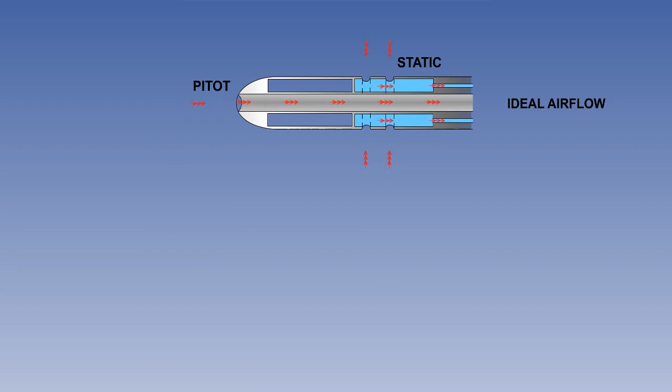However, if the aircraft is moving, a suction effect will be created which will cause the static pressure sensed to be lower than the ambient pressure. As the speed increases, the airflow in the region of the pitot-static heads becomes turbulent and this under-reading becomes greater.

How great the error may be depends on the location of the pressure head and the speed of the aircraft. Speed and turbulence may also affect the pitot tube readings, making them either above or below their correct value.

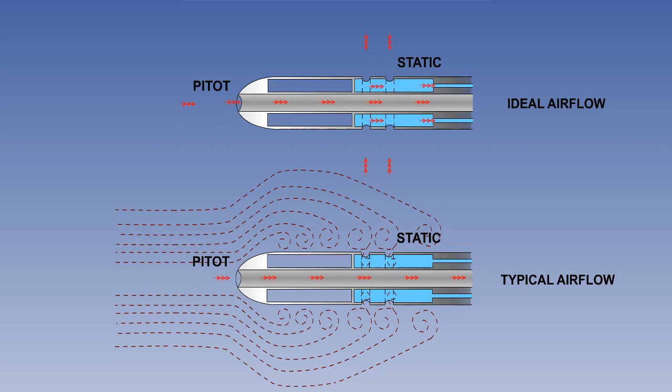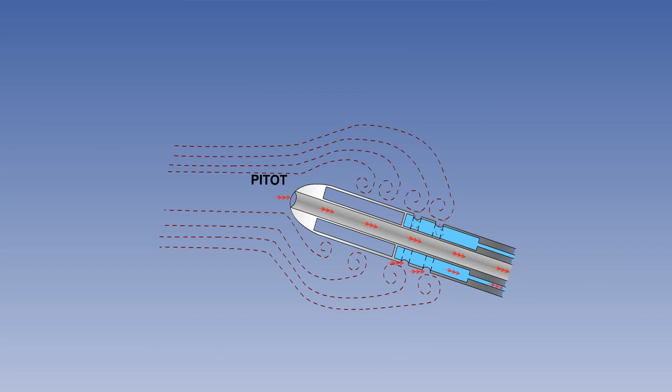At high angles of attack, a component of dynamic pressure may also be sensed at the static head. Any error sensed is likely to be at its greatest at high angles of attack and low speed. The high angle of attack may also cause a loss of dynamic pressure in the pitot tube.

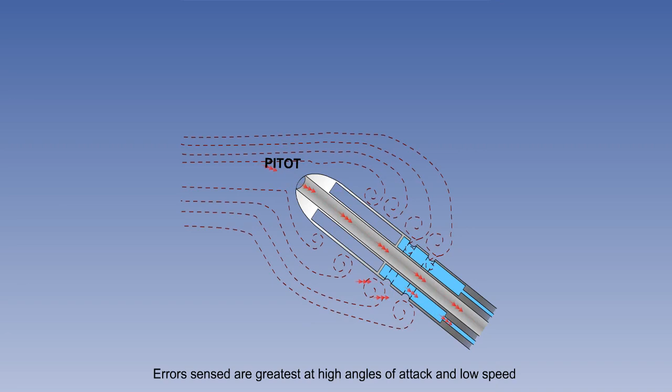Operation of the flaps or slats can cause significant changes to the angle of attack, which in turn can affect the turbulence created, and flight manuals may list different values of position error for different flap settings.

Before moving on to the next error, which is maneuver error, let's look first at how the effect of position error can be reduced.

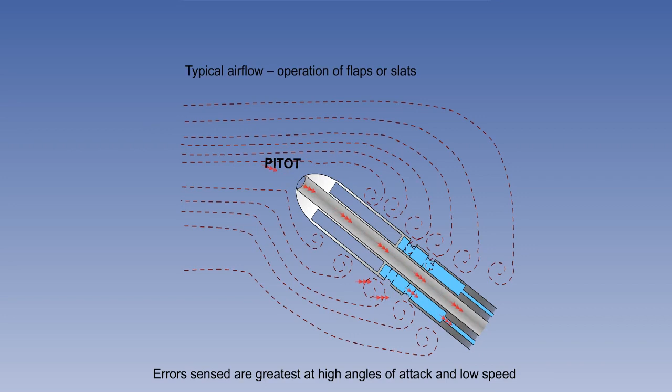The effect of position error can be substantially reduced by replacing the static pressure head with a static vent. There are some locations on the aircraft, usually on the side of the fuselage, where true or nearly true static pressure can be sensed over the whole speed range of the aircraft. A static vent is fitted in this location.

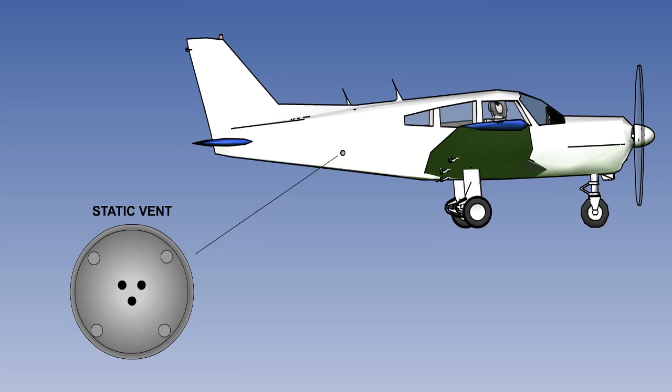The vent consists simply of a small flat metal plate with holes which form a vent opening in the centre of the plate. The vent is fitted flush with the fuselage and is connected to the pressure lines which feed the pressure instruments. The pressure line is angled upwards from the vent in order to prevent the accumulation of water and therefore does not require heating.

About 90% of the combined pressure head position error can be eliminated by the use of a separate static vent.

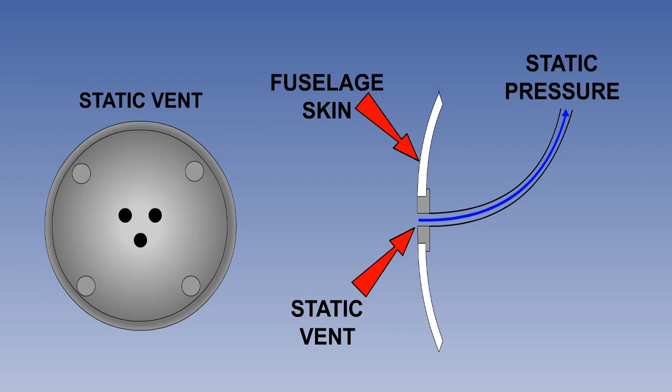It is usual to have two interconnected static vents, one on each side of the fuselage, to ensure that any errors produced by side-slipping or yawing are minimized or balanced out. Duplication also reduces the chance of the system becoming blocked.

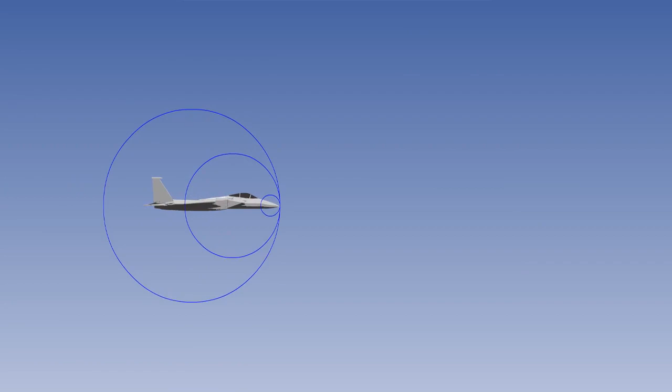However, static vents are not suitable for every aircraft. For instance, aircraft designed for very high speed are unsuitable because the shock waves generated at high Mach numbers can produce significant errors in the pressure sensed by a static vent.

On very high speed aircraft, therefore, a more sophisticated combined pitot-static head or high-speed probe is used. This will have been specially designed to reduce position error, but will be more expensive than the basic combined probe found on low-speed aircraft.

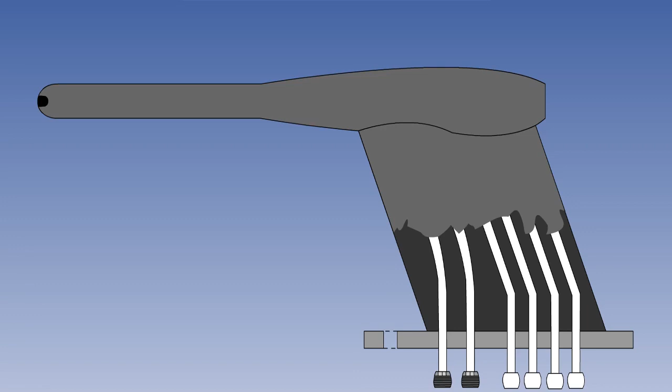The second error we will consider is maneuver-induced error. This error results mainly from temporary fluctuations of air pressure at the static vents, caused in particular by changes in the aircraft's angle of attack or when the flaps are activated.

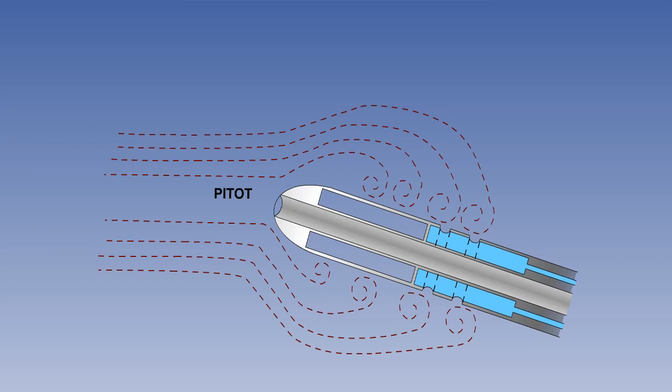The error is usually most significant during pitch changes, such as at the start of a climb or levelling off and descending.

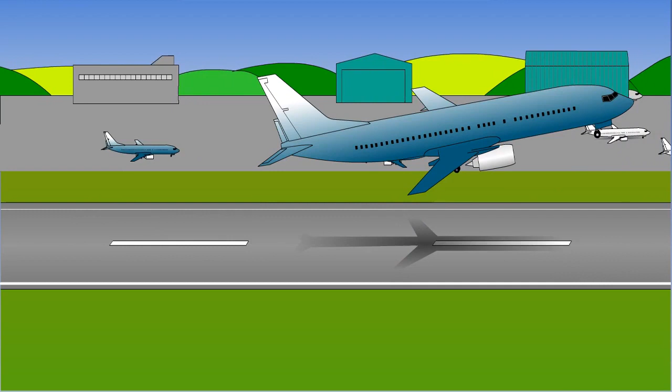Maneuver-induced error normally causes a lag in pressure instrument readings.

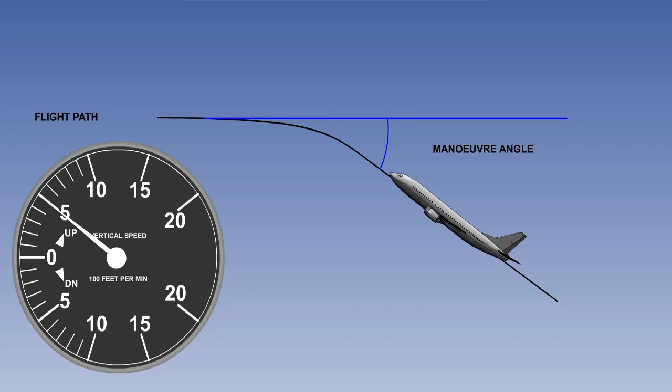The error is best illustrated by looking at a vertical speed indicator reading as the aircraft levels off. In level flight, the pointer on the VSI will read zero, so keep an eye on the pointer. In our example, the aircraft is climbing at an indicated reading of 500 feet per minute. Watch what happens to the reading when the aircraft levels off, and we can see that the VSI reading is not an accurate representation of the aircraft's actual flight path.

The lag in pressure instrument readings can persist for some time after the event, and therefore pressure instruments cannot be relied upon to indicate accurate instantaneous rates of change. The higher the altitude of the aircraft, the longer the error will likely last.

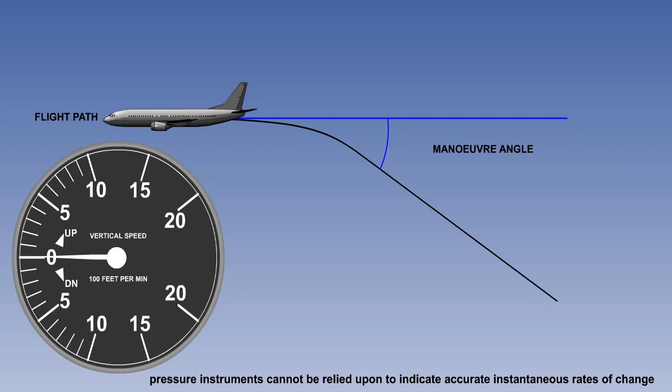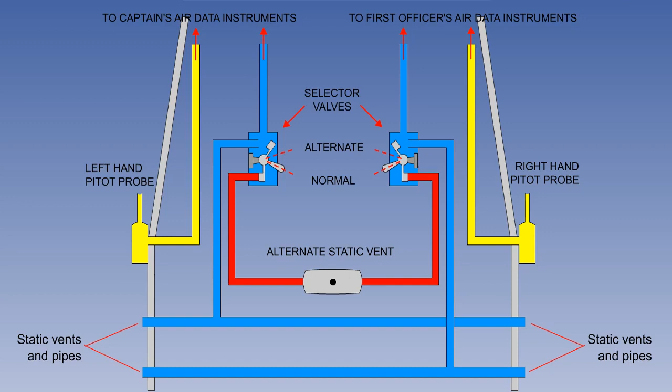Although the captain's and first officer's systems are usually independent of each other, they each sense pressures from both left and right sides of the aircraft. Note that the two static systems are also capable of being cross-fed and supplied by an alternate static source.

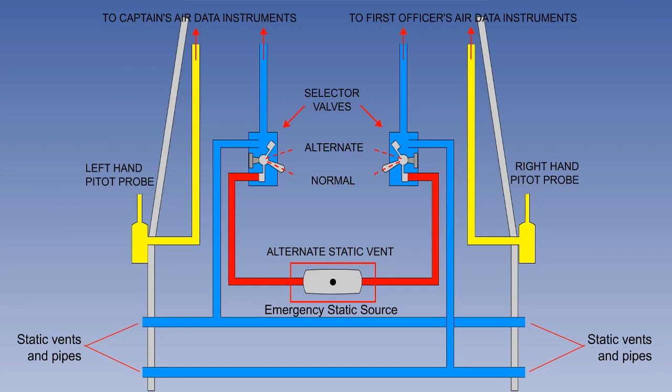The alternate static source may also be referred to as an emergency static source, for use in the event that the primary source becomes blocked. It is unlikely that the alternate static source will be fitted in the optimum location on the aircraft, and so it will provide a less accurate reading.

In pressurized aircraft, the alternate static source is often located within the unpressurized rear fuselage, and in unpressurized aircraft, the alternate static source can be located within the cabin. We can see a typical location in an unpressurized aircraft here.

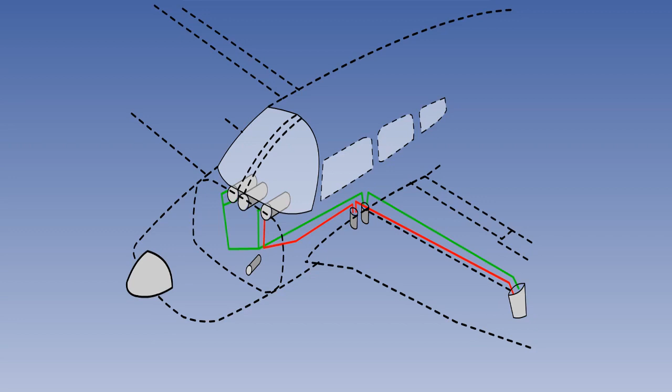Often, as a result, the static pressure sensed will be lowered slightly due to aerodynamic suction, and this will cause the pressure altimeter and the airspeed indicator to overread. The error should be tabulated in the aircraft flight manual.

In older or basic aircraft, air pipelines are used to transmit the pitot-static pressures to the instruments. A simple pipeline is illustrated here. Modern aircraft transmit the information electronically via pressure transducers at the pitot and static sources.

The effect of blockages and leaks in the pitot-static systems on each of the pressure instruments is dealt with in the individual instrument lessons. This concludes the lesson. A summary follows.

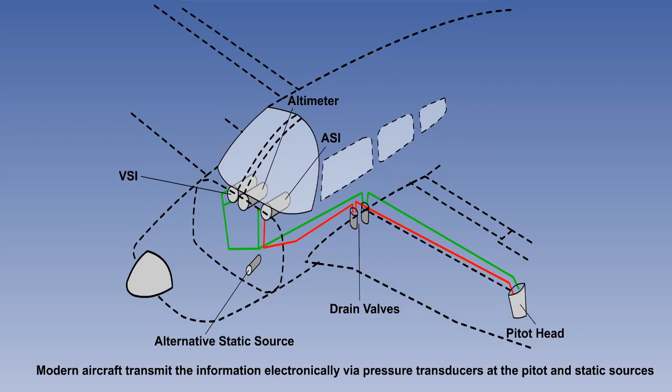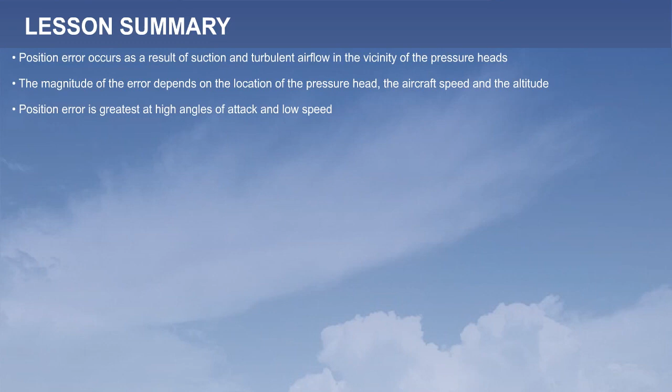Position error occurs as a result of suction and turbulent airflow in the vicinity of the pressure heads. The magnitude of the error depends on the location of the pressure head, the aircraft speed, and the altitude. Position error is greatest at high angles of attack and low speed. Operation of the flaps and landing gear can have a significant effect on the turbulence created.

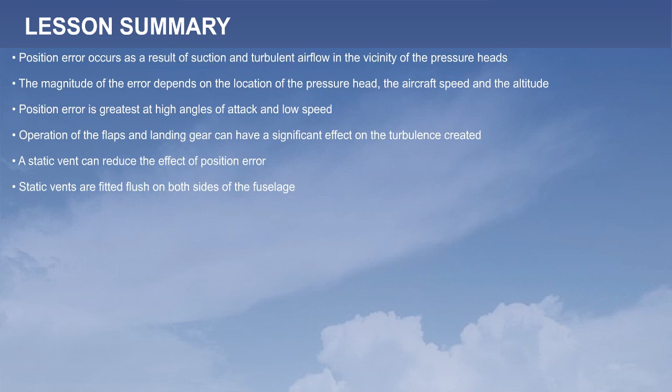The use of static vents can reduce the effect of position error. Static vents are fitted flush on both sides of the fuselage and are interconnected to reduce the effects of yaw and side slip. Duplication reduces the chance of the system becoming blocked.

Static vents are not suitable for flight at very high speeds because of the shock waves produced. A high-speed probe is used instead.

Maneuver-induced error is caused by temporary fluctuations of air pressure at the static vents during pitch changes. Maneuver-induced error results in a lag in pressure instrument readings. The higher the altitude, the longer the error will last.

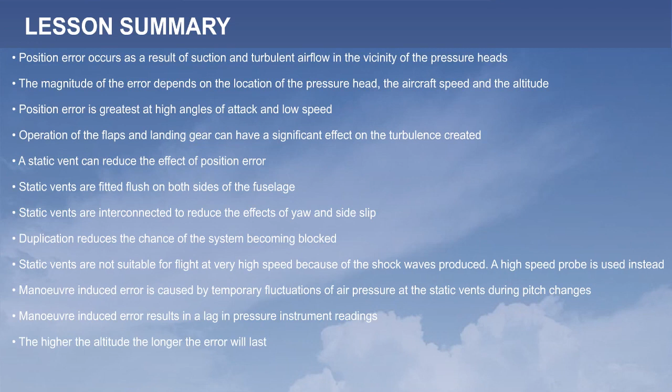Static pressure sensed by an alternate static source will not be that to which the instruments are calibrated and may be in error. This will be tabulated in the flight manual. The error is likely to give a lower pressure, which will cause the altimeter and ASI to overread.